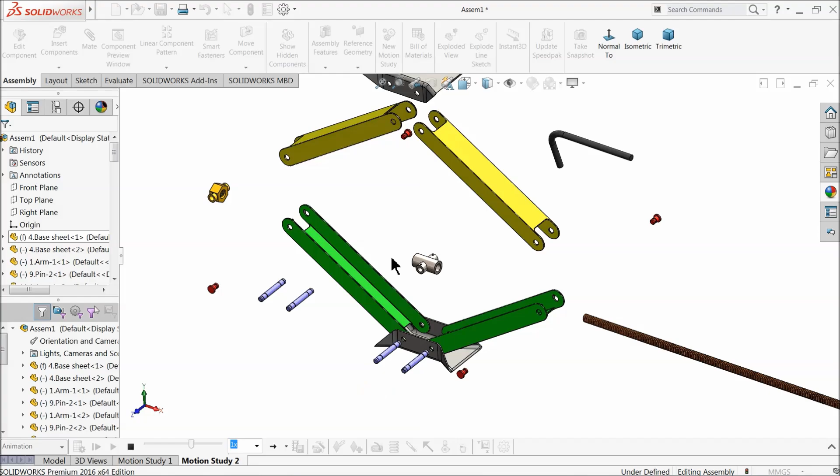Today we are going to design a simple car jack. This is a screw with threaded. Here we will design and assemble at the end, and we will give this little exploded view animation. I hope you like it. So let's see how to do in SolidWorks. It is very interesting and simple project. I'll try to show 2D files also here.

That's it. Now see, this is the jack. This is the threaded view, threaded jack. I wish you like it.

Okay, so let's start, we will make each and every part and assemble at the end. Now here let's start the first part of car jack, arm 1. We will make the first arm here. So choose here top plane, sketch, center rectangle, and draw a rectangle with the help of origin point.

Let's keep the dimension 250 by 45 millimeter. Okay, and extrude only up to 2 millimeter. Now here let's define the material color.

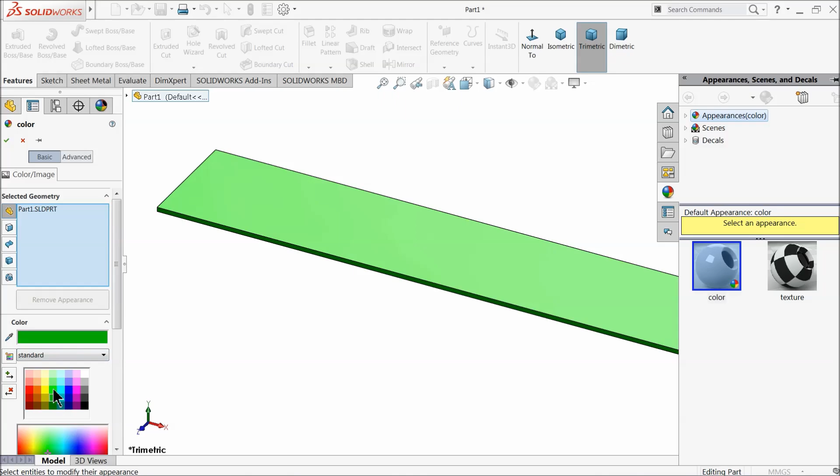Front plane, sketch normal. Here we want to create this. Let's choose a line and start from any one point. Make sure horizontal and convert into half circle and click this line. Exit. Draw a line up to here, convert it into half circle, exit. Now let's define this.

117.5 millimeter, and let's check overall length 235 millimeter. Radius 14 millimeter.

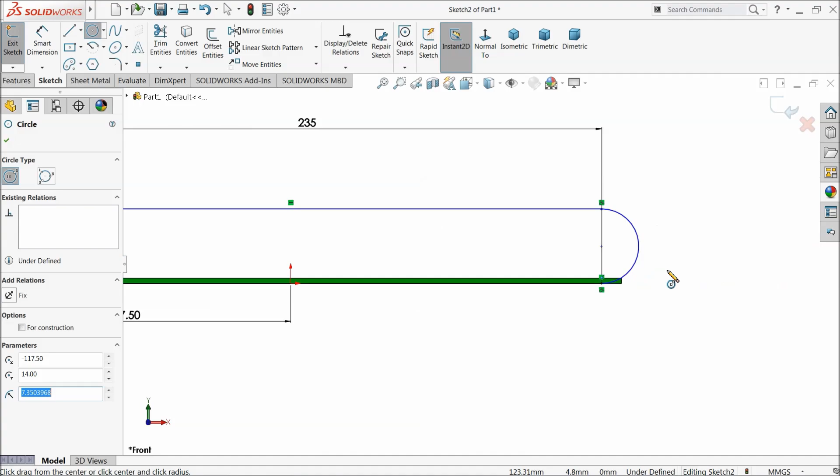Choose here circle. Draw two circles at both the ends. Okay, now select both the circles, make relation equal, and choose smart dimension and define it 8 millimeter. That's it.

Now let's check the dimension, 14 millimeter, okay it's by default. Exit. It should be tangent relation here. Okay, now our design is fully defined.

So select extruded boss. First we want to shift in one corner, so choose here offset 22.5 millimeter, you can see it here. 2 millimeter thickness, reverse.

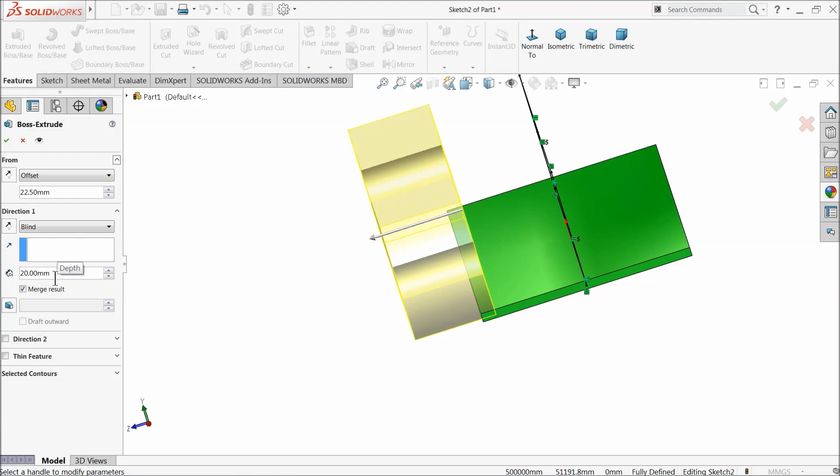This one, extrude, sorry let's keep, no, extrude also we want 2 millimeter. If reverse, then this dimension is not sufficient. Select OK.

Now there is a gap, so choose first drawing, edit. This one it should be 45 degree, 45 millimeter. Exit. Now check. Now it's coming out. Edit. Reverse. Now this is perfect. Okay.

Now select, we want to mirror adjust. So select front plane. Here choose mirror. Select this body only, extruded. Or you can choose it from here. Okay, see.

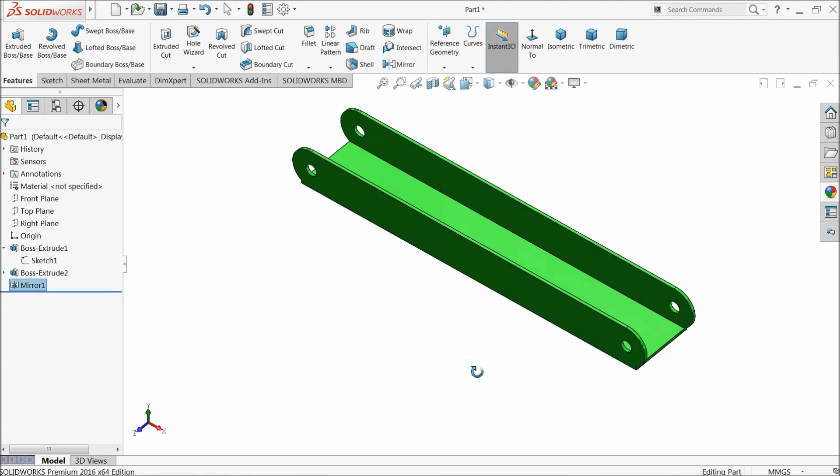Now select this inside face, sketch normal. Choose corner rectangle and select this line and draw a rectangle. Exit. Select these two lines, make relation collinear. Now let's define the dimension. From here to this point, keep 15 millimeter. Okay, this outside you don't need anything because we want to cut it. So choose here extruded cut and keep through all.

We want to cut this thickness. Okay. Now select this face, sketch normal. Choose here center point arc. This is the center point and this is the point, and up to this line. Select line.

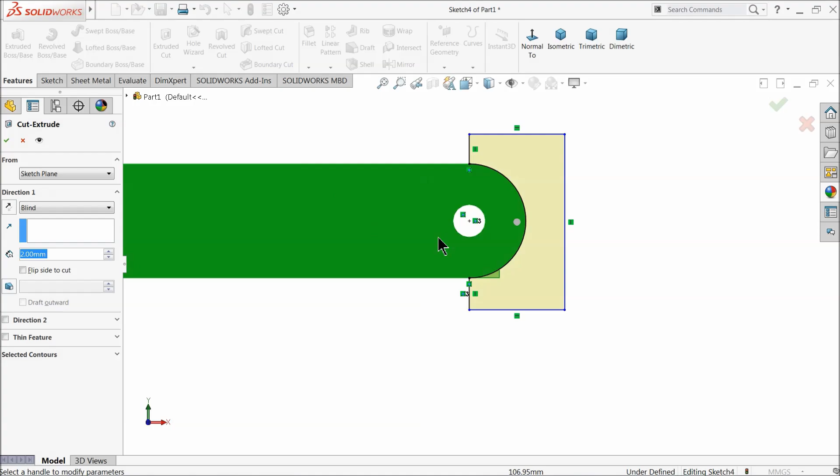Exit. We want to cut this extra face. That's it. Extruded cut, see here. Select here through all. Let's rotate. See, we want to cut on both sides. Okay, now that's it.

Now let's try to mirror. Right plane, mirror. And select here extruded cut 1, extruded cut 2. Okay, that's it. Choose mirror, chamfer, 3 millimeter. Select another end. Okay.

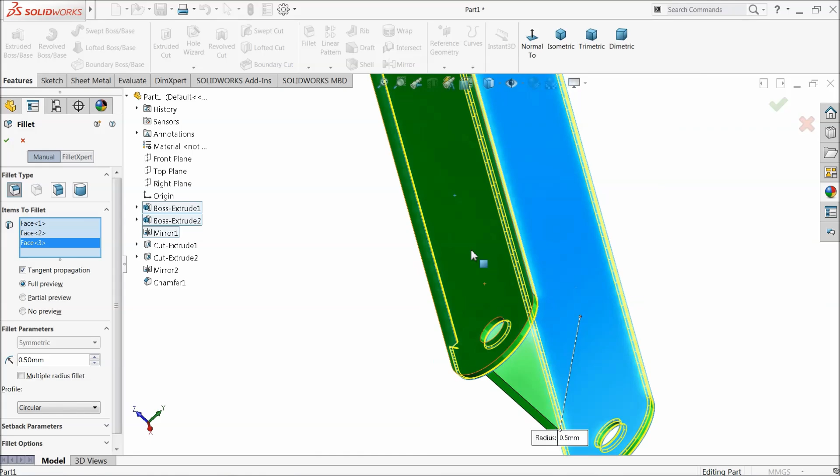Choose fillet. And here select these faces, 0.5 millimeter. It's select inside faces also. Let's keep the back side so that all area will be covered. Okay.

Now this is our first part. Let's try to make it more glossy. Okay, this is save it.

Create a folder. Car jack. Part 1, arm-1.

Now let's, here we will create the arm 2 with the help of arm 1. So first let change this color yellow. Okay.

Now select this part 2, extruded body part 2, just edit, make offset 20 millimeter. Okay, it might show you an error here, but it will correct it. Now go to extruded boss 1, sketch 1, edit, and make this length 40 millimeter. Now exit.

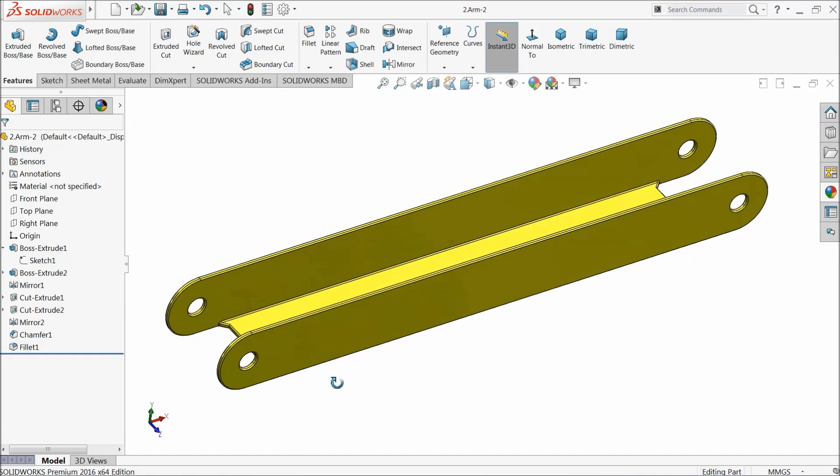Let's see the next part here. Now here we will make the third part, torque handle. So choose here top plane, sketch, circle, and draw here a circle, and let's keep the diameter 9 millimeter.

Now exit. Okay, let's choose front plane, sketch, line here, and here we will draw the path for torque. Exit. Let's define it 150 millimeter and 80 millimeter. Okay, choose here fillet.

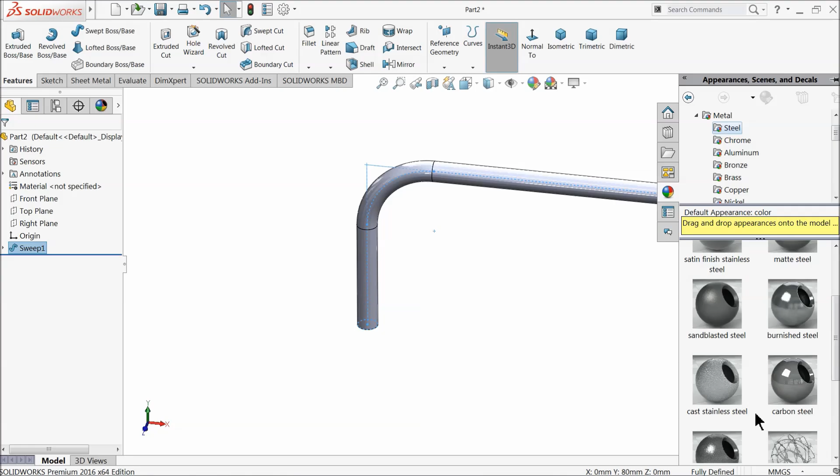Okay, let's keep 30 millimeter, that's fine. Now select here Sweep boss base, select here first profile, then select the path, see here. Okay, go to appearance, metal, and let's define some steel metal. And let's see the machined steel or rough steel. Or let's define some iron.

Just drag into this part, appearance filter. Okay, let's save this part number 3, torque handle.

Here the next part is base sheet. So let's start. Top plane, sketch, and select line up to origin point, then go down, make little taper and connect. Draw one more line, exit. Now let's define it 70 millimeter,

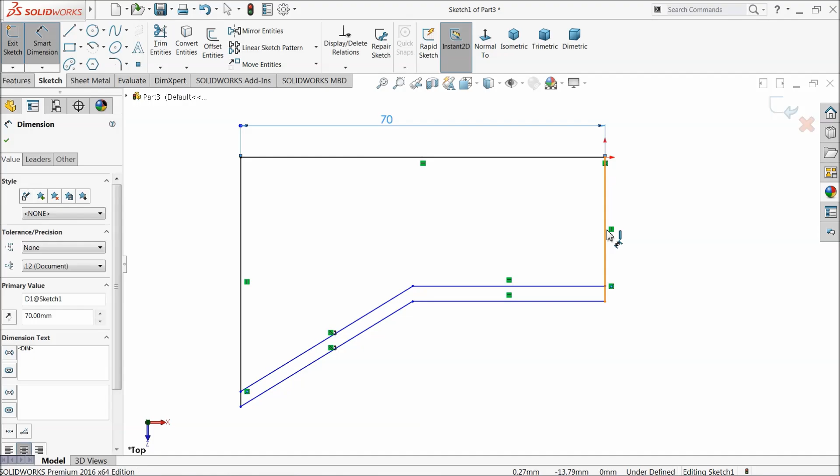25 millimeter, let's say 40 millimeter, and let's make the gap angle 150 degree. Okay, let's define the gap, 2 millimeter. Okay, now select both the end points, make vertical relation.

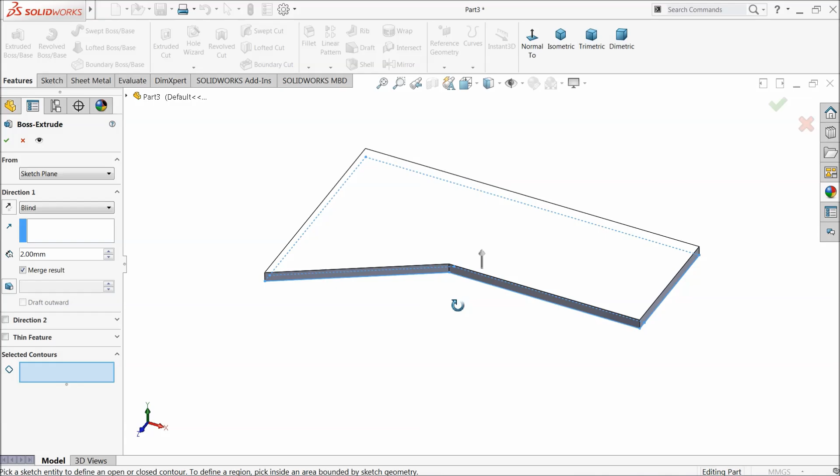Now it is fully defined, our sketch is fully defined. So select extruded boss, select this face and this face also, make 2 millimeter thickness. That's it. Okay. Now again choose the same sketch, extruded boss, same sketch, extrude.

Here select this area only, you can see. Extrude up to 32 millimeter. Okay, that's it.

Now select this face, sketch, normal. Now here we want to cut some, select from here to here, exit. Now let's define this bottom edge, 2 millimeter, 1.875 millimeter. Okay, that's enough, we want to cut it.

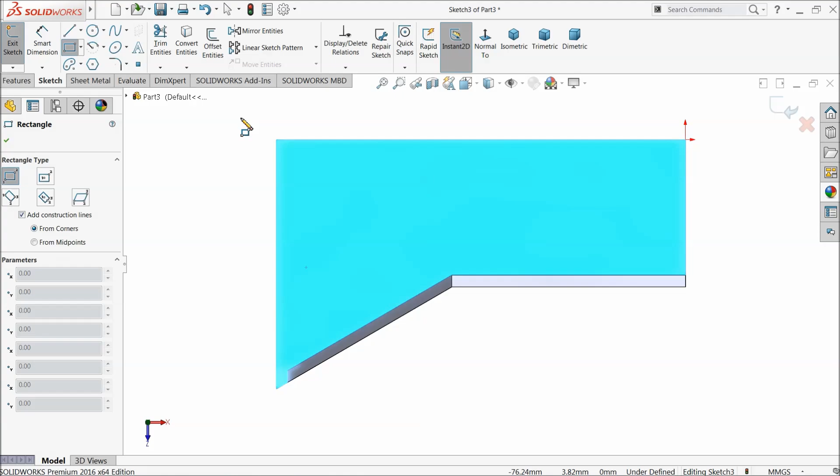Select here extruded cut, keep mid plane. Okay, that's it. See here. Now select this face, sketch, normal, corner rectangle, exit.

Select these two lines, collinear. Now let's check one more time the gap, 1.875 millimeter. Okay, that's enough. This is what the portion we need to cut it. Select extruded cut and here keep end condition through all.

Okay, now it's time to add something, some fillet we need to add here. Choose fillet, keep 15 millimeter. Select this edge, select this upper edge and select the back side edge. Now let's see, okay, see it's become fully changed.

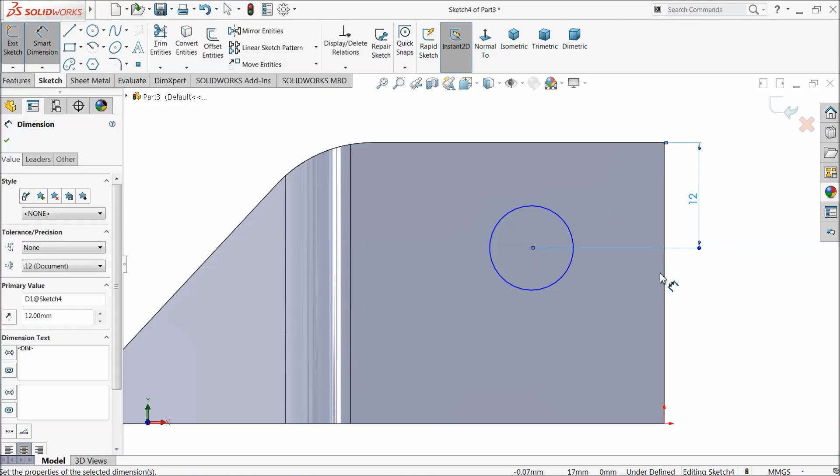Select this face, sketch, normal and choose here hole and let's make a hole here. 12 millimeter, and the distance from outer edge 25 millimeter. 8 millimeter the diameter.

Okay, select extruded cut, keep end condition through all. Okay, again check the dimension, 25, 12, 8 millimeter. That's okay.

Now choose fillet, select 5 millimeter. This time select this edge and inside edge. Okay, now see it's become fully converted.

Fillet, select this edge only. Okay, close. Let's reduce it, 3 millimeter, also too big. Point 5, let's try a little bigger, 1 millimeter. Okay,

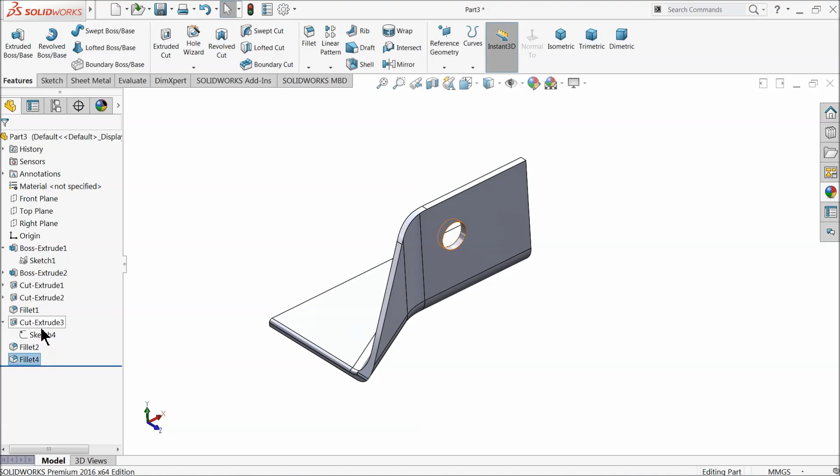Now it's time to mirror this body here. Actually this, let's try some little bigger, 4 millimeter, no, 3 millimeter. Okay, that's also enough, 3 millimeter.

Choose front plane, mirror, select here bodies, select this full body and you can see it here, preview, solid merge. Okay, that's it. Now the next, choose here right plane, mirror, choose here body. Now you can see it here.

So this is our base sheet. It is usable for base and lifting to the vehicle. Make little dark color. Okay. Now let's save it.

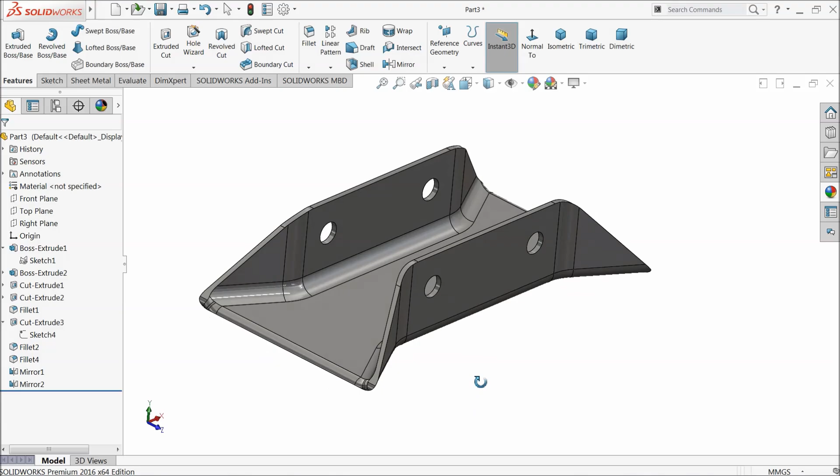Part number 4, base sheet. Let's see. Now here let's do the main part of car jack, screw rod. So let's start.

Front plane sketch. Draw a circle and choose smart dimension and make it 8.5 millimeter diameter. Then extrude it and extrude up to 520 millimeter. Make it reverse. Okay.

Let's define the material. Okay. Now here we want to create the thread. So first choose this face, circle, and draw little bigger circle.

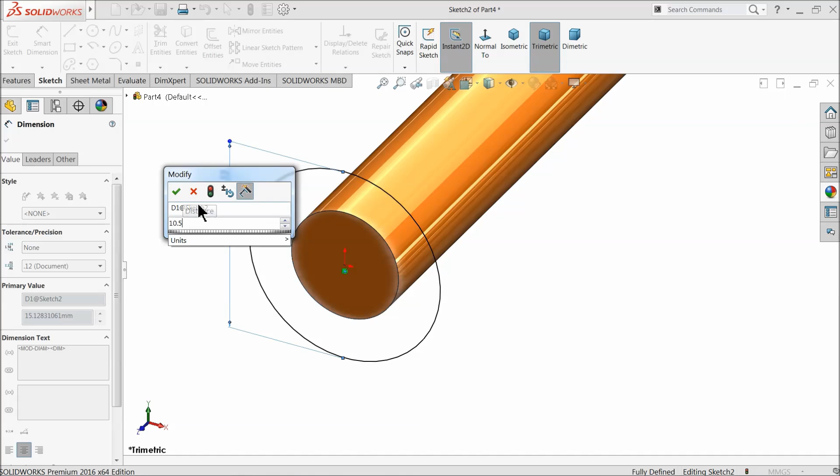Let's say 10.5 millimeter. Go to feature here, and here you will find one option, helix and spiral. Now here we want to create some teeth and keep pitch and height constant. Height, let's say we will keep 102 millimeter.

Pitch, let's say 3 millimeter. This one we can little increase also, 306. Anyway, let's try 102 only, and then little we will extrude reverse direction 90-degree clockwise. That's it.

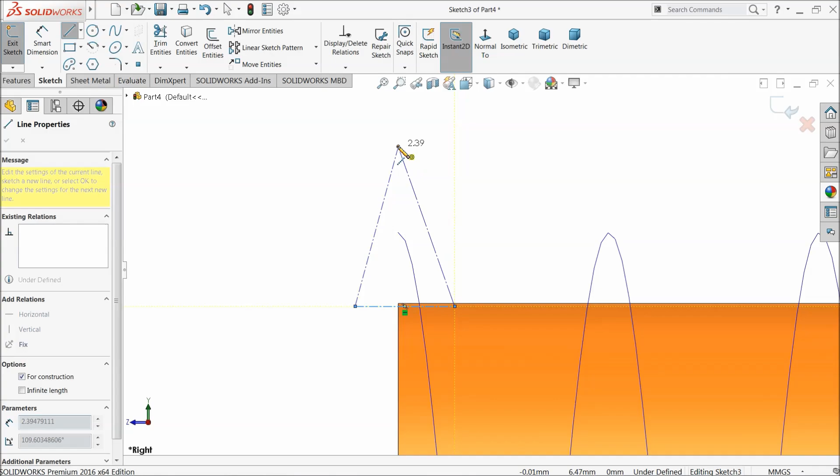Now choose right plane, sketch, normal. Now here let's make the profile. Make by center line. Exit. Vertical.

Keep angle 30 degree. Okay. Now select this point and this line collinear, so that it will be perfect here. And one more relation, collinear. See, it's just parallel to this line, or even you can create a relation from here.

Draw one more line. Make sure both the lines horizontal. Now let's define it from origin point.

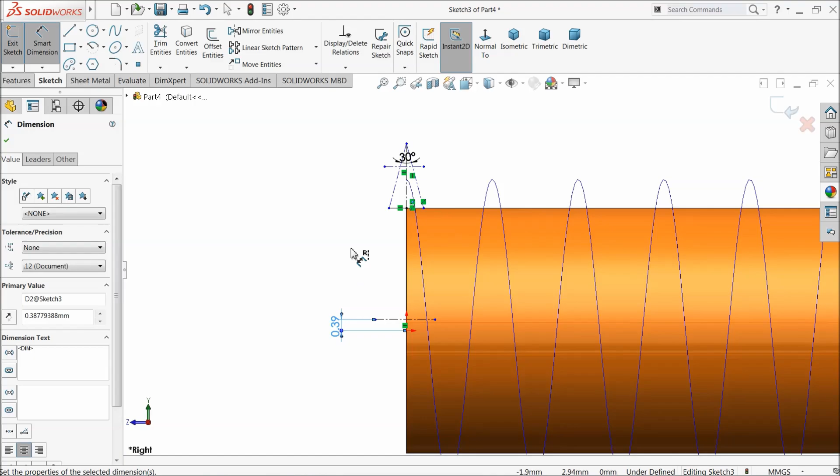5.25 millimeter. The second line from origin point 6 millimeter. See here. Okay.

Star point. I think no need, this in perfect position. Choose here line. Let's define it first. Distance from here, no, we actually need a star point. Put it one star here, one in the center.

.75. This is what we required here. And put one star point here, and let's define this gap. By default 1.1, that's okay. Now select line and connect it here to this point.

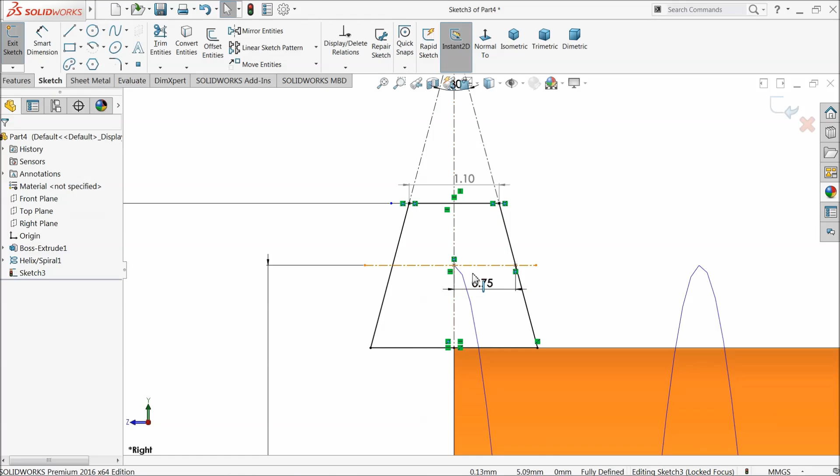Exit. Now this is our geometry. Exit. Swept boss base. Select the profile. Now see, you can see the thread.

Now here make one more option. Uncheck this merge result. Okay. Now let's make multiple number of this thread here. So just go to insert, feature, move and copy. Select translate, copy. Select these threads. Sweep1.

You can directly select from this list. Keep distance 102 millimeter because this is our distance in helix spiral height. Make 2, 3, 4. 4 is enough to cover all the geometry. Okay, that's it.

Now select this face, sketch, and draw here a quite bigger circle. 12 millimeter. And extrude it up to 11 millimeter reverse direction. Okay, that's it.

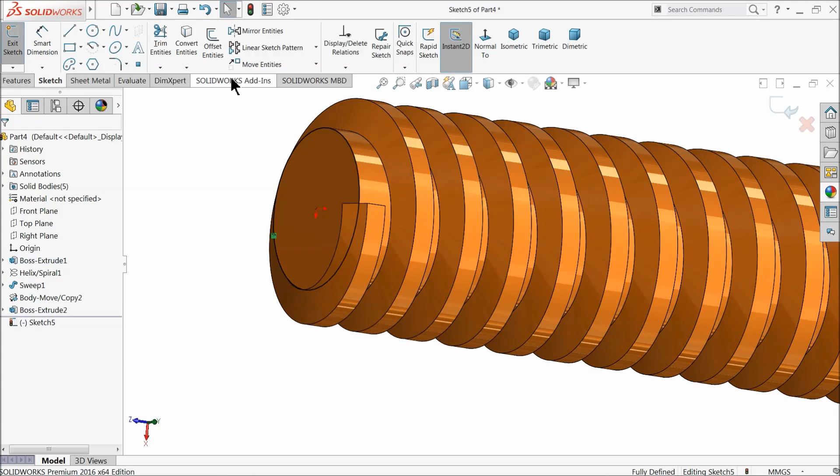Now comes here, see, we want to trim this face, so select this face, sketch, convert entity. Now this circle converted, just extrude it. .02 millimeter. Okay.

Now we want to cut some face. I'll again choose the same face, sketch, circle, up to this. Now let's define outer one 13 millimeter. The inner one is same as previous, 8.5.

Now select extruded cut and make the depth 1 millimeter. See here. That's it. Make chamfer 3 millimeter, 30 degree. Select this corner.

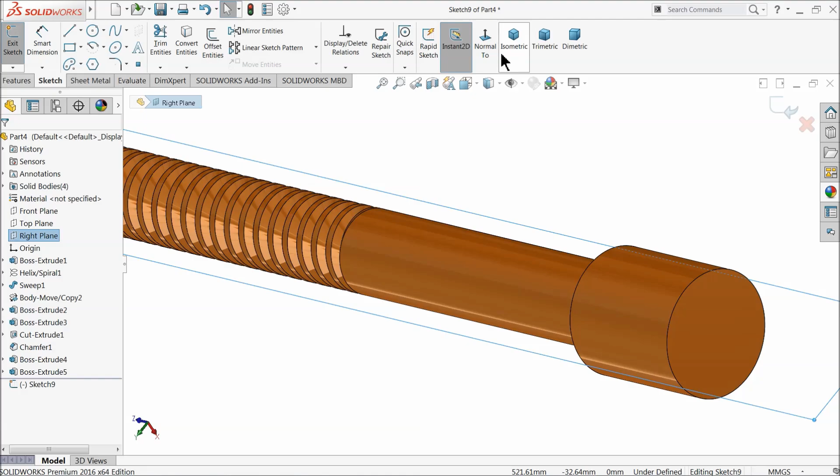Now here we want to create one groove, so select right plane, sketch. It's hanging, I think. Okay. And draw a center line. Select corner rectangle. Okay, now let's define it. 1.55 millimeter. 1.2 millimeter.

Okay, now let's drag it up to a distance from center line, 5.65 millimeter. Okay, now distance from this line, 40.2 millimeter. That's it. Fillet 0.1 millimeter and select these two corners. Okay.

Now select here revolve cut. Select this line as axis. You can see the preview here. Okay, so this is our simple groove. We required this groove for assembly. Here we will fix some circlip.

Now select top plane, sketch. Now here we want to create a hole for torque handle. 10mm, and the distance from, let's say, this corner keep 9mm. Okay, and select here extruded cut and keep end condition mid plane. Okay.

Fillet. Okay. So this is our screw rod.

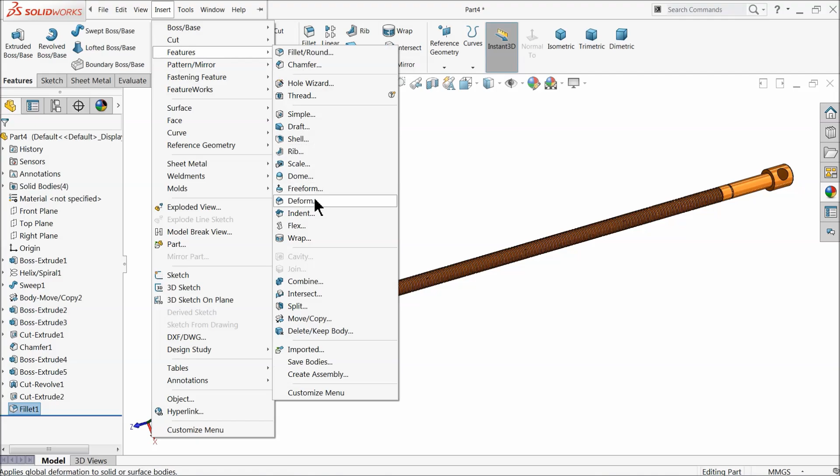We will use one more command, insert feature, combine command, add. 1, 2, 3, 4, and okay, everything is selected here. Okay, now this all become one body. And let's save this screw rod, part number 5, screw rod. Okay.

Now here the next part is screw nut. We already created screw rod, so let's start. Front plane sketch, select here circle and draw a rod here. Let's keep the diameter 8.5 millimeter. Okay, and select extruded boss and extrude up to 30 millimeter. Keep reverse direction. Okay, that's it.

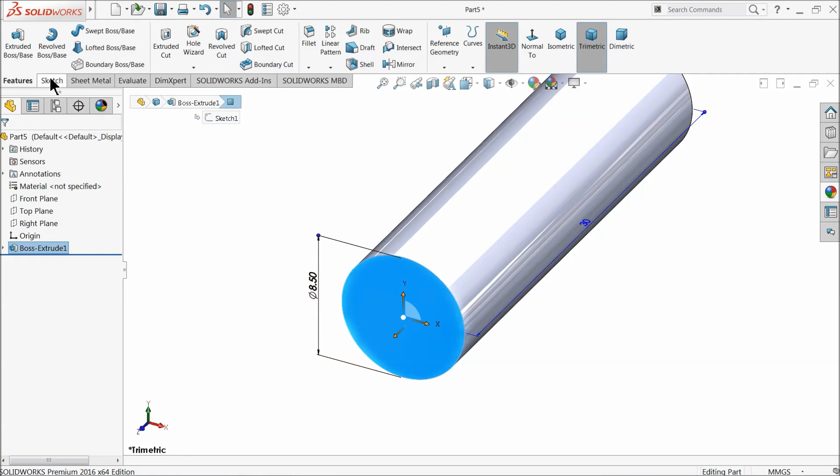Now here we want to create some threaded portion, so let's make it. Choose this face, sketch circle, and let's keep the diameter 10.5 millimeter. Go to feature, go to curves, choose here helix and spiral. Keep height and pitch constant. Pitch height keep 22 millimeter. This is sufficient, pitch 3 numbers, and make it reverse 90-degree clockwise.

Okay, that's it. Now it's time to create some profile, so choose here right plane, sketch, center line up to this point. Exit. Now define some center line. Make sure both the lines are horizontal.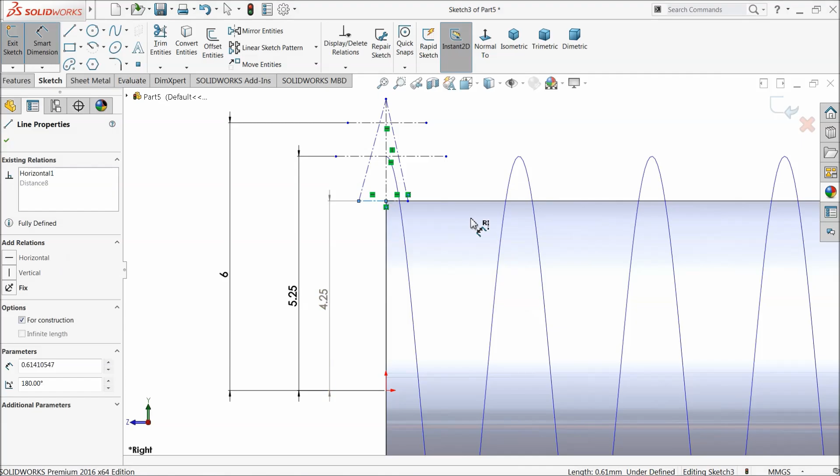Now let's define the dimension. 5.25 millimeter. The upper one 6 millimeter. And this one by default I think 4.25, that's okay. Keep angle 30 degree, 15 degree. That's it. Choose here star point, 1 star here, 1 star here. Okay.

Now let's define .75 millimeter. Now this one select by default 1.1 millimeter. Okay, now this is fully defined, so select here line and create our main geometry up. Okay, exit. Now this is our profile geometry.

Exit. Go to Swept boss base. See here profile selected, just select the path. Now you can see the thread. Go to option, uncheck this merge result. Okay. Now you can hide this.

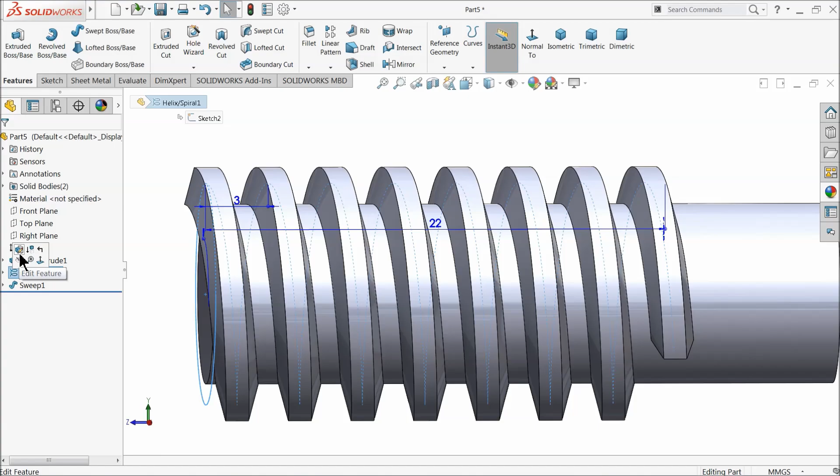Now we want to create a main body, so choose here top plane, sketch, select corner rectangle. Okay, now let's define it. 10 millimeter by 15 millimeter, and the distance from origin point let's keep 2 millimeter, and the same here, the horizontal distance 4.5 millimeter. That's it.

And now let's first make one center line so that we will easily revolve our body. Okay. Select revolve boss base, select this line as axis. Unmerge the result—it's important because we want to delete this face. Okay, see here.

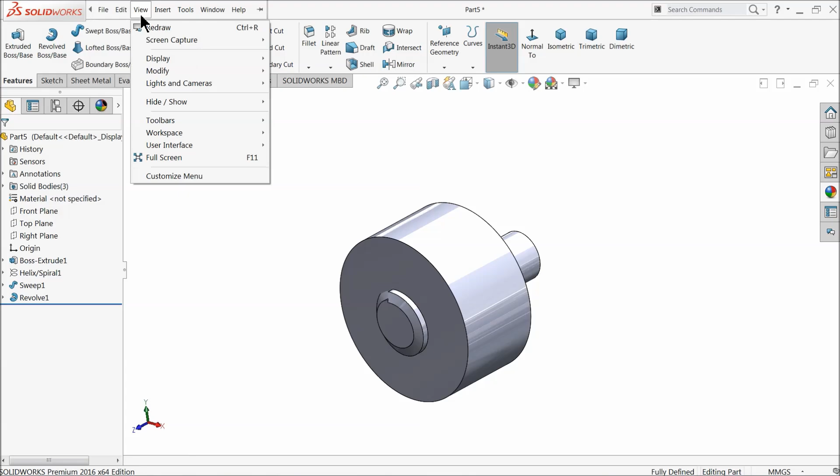Now go to insert feature and here you will find add combine. Select this option, combine, here select subtract. Select this is the main body and here select extruded boss and sweep, or you can directly select swept and extruded body. Okay, now see it's cut out, we cut the thread inside.

Now let's give the nut shape a sketch normal. Choose here polygon, keep 6 numbers. Okay, now select this any one and vertical and let's make it 14 millimeter. Circle, take some bigger circle, any dimension. Okay, now select extruded cut, then this portion we would like to cut. Okay.

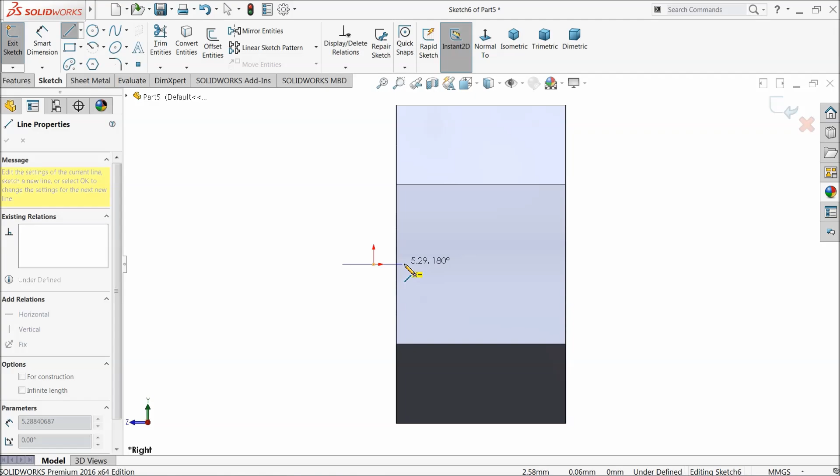Now see it took this shape, nut shape. Now here we want to make some circular cutout. Now choose here right plane, sketch. Select here line, it must pass through origin point. Exit. Now let's define it.

60 degrees. 4 millimeter, this is the important dimension, and outside anything it's up to you. Make 8 millimeter.

Select here revolve cut. Now select this line, bottom line, as the axis. Okay, now we cut it here.

Now we want to mirror it, so let's check if any plane is available. No, so we need to create a plane. Just go to plane, select this face and this face, and it's going to create a mid plane here.

Now select this mid plane, mirror, and select this cut revolve. You can see the preview here. Okay, that's it. Now hide it.

Right plane, plane, we want to create one more plane here. Keep distance 18 millimeter. Okay, now select this plane to sketch a circle.

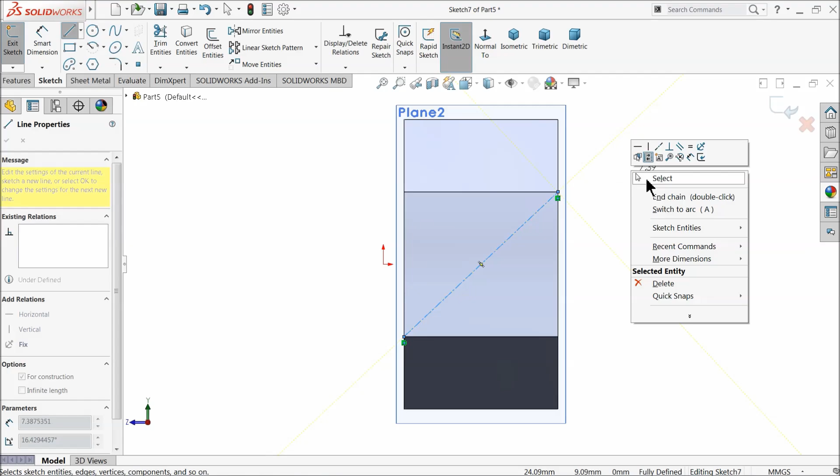We need to draw a center line, so do one thing: draw a diagonal line. Now define the midline.

Keep diameter 8 millimeter. Okay, now make the circle little small. Now let's make the gap between two circles 2.5 millimeter.

Delete this circle and make it little bigger. Now try 2.5 millimeter bigger than this 8 millimeter.

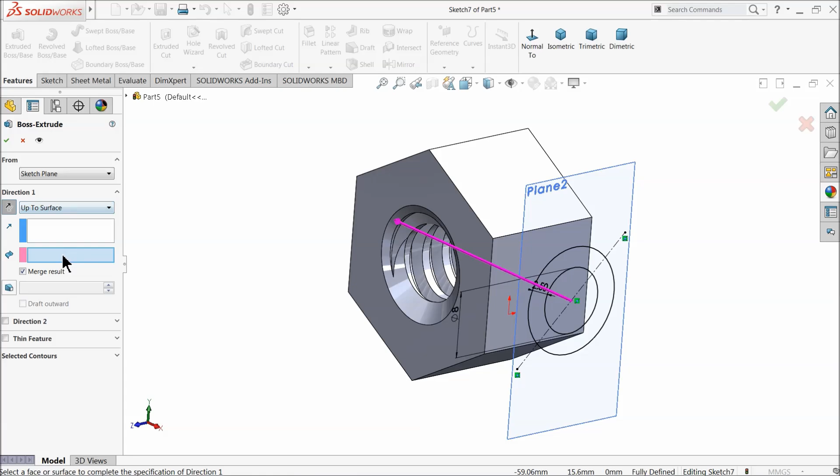Okay, now select extruded boss, keep reverse direction, and select here up to surface. Select this surface.

Now hide this plane. Now again choose the same sketch and select here extruded cut. Now select contour, here select this inside portion only, see this inside portion, and keep 10 millimeter cut out.

You can see it here. Okay, see, it is very useful during assembly.

Now it's time to mirror this one, so let's choose any suitable plane. Okay, right plane, mirror. First select this body and extruded cut.

Something went wrong. Clear those.

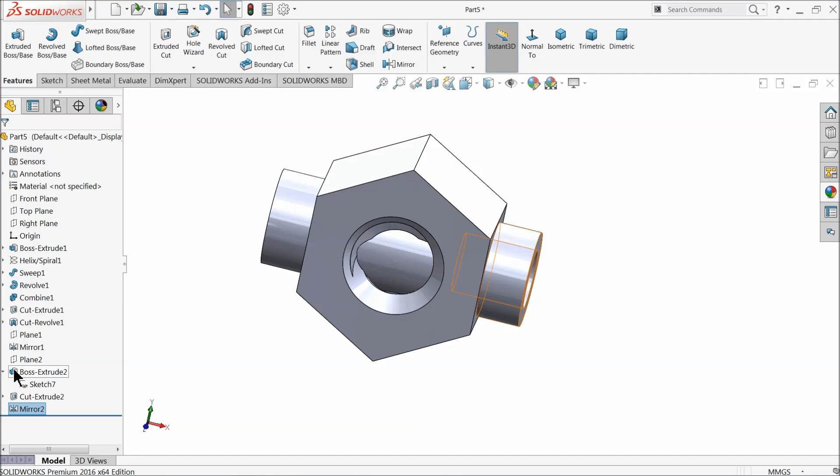Exit, and we will do one modification to this extruded body: edit, and let's not make a surface, keep it blind, and make 10 millimeter. Okay, now see, that's perfect, it's mirrored.

Now let's create one more plane, top plane, plane, 6.5 millimeter.

Now select this plane, take this position, hole wizard, select here straight tap, standard DIN, tapped hole. We want to create some tapped hole. Let's keep 3 millimeter and 6 millimeter blind.

Choose here cosmetic, select position, select one here and one here, uncheck this smart dimension.

3 millimeter, .5, the same as what we will find here, 3 millimeter, .5 millimeter. That's it, so this is the hole position.

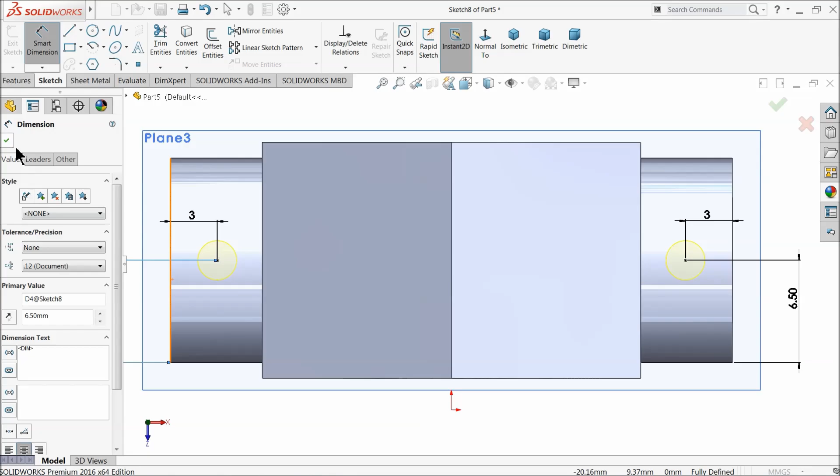Okay, select here. Okay, see, if you want to see this tapped hole, just go to options, properties, detailing, select shaded cosmetic thread.

Okay, now you can see here, now you can hide this plane. So this is the screw nut.

Let's make it little different. Okay, that's looking vibrant. Okay, let's save it. Screw nut.

Now here let's make part number 4, screw holder. Front plane, circle, make 2 circles, outer one keep 20 millimeter and inner one 12.2 millimeter.

And extrude it, extrude up to 40 millimeter and keep end condition mid plane.

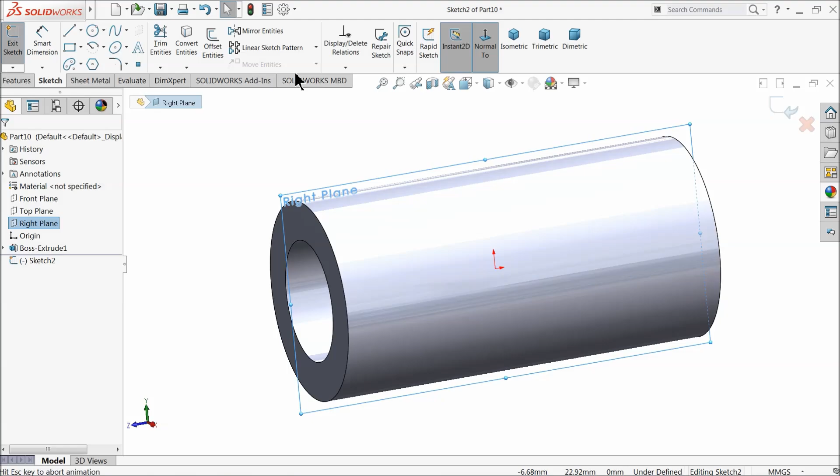See, now select right plane, sketch normal, choose here circle, uh, cancel it. We want to create a plane, so right plane, plane, 18 millimeter. Okay, now select this plane, sketch, and draw here two circles from the origin point.

Now let's define the outer one, keep 14 mm, and the inner one let's make 8 millimeter.

Now extrude. Here choose up to surface, or even select up to next. Up to next not sufficient, I think. Let's select surface.

Right plane, mirror, and mirror this part. Okay, that's it. Now hide this plane, top plane, and create one plane just 7 millimeter above the top plane.

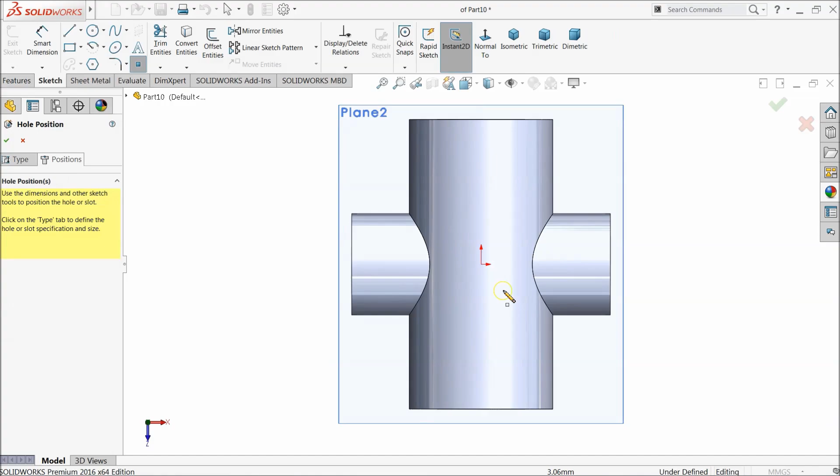Okay, now select this plane and take normal position, hole wizard. Select here straight tap, DIN standard M3, 8.6 mm, take position, make sure parallel to the origin point.

Okay, choose here smart dimension, three millimeter, the same here, 3 millimeter. Okay, now select both these center points and origin point.

We need to make actually a relation, horizontal. Try horizontal. Okay, okay. Now see, go to options, documents, detailing, check the shaded cosmetic thread.

Okay, now hide this plane. You can see this is our fourth part.

Let's define the material, steel, satin finish stainless steel. Let's save as part number 4.

This one is actually part number 7, screw holder.

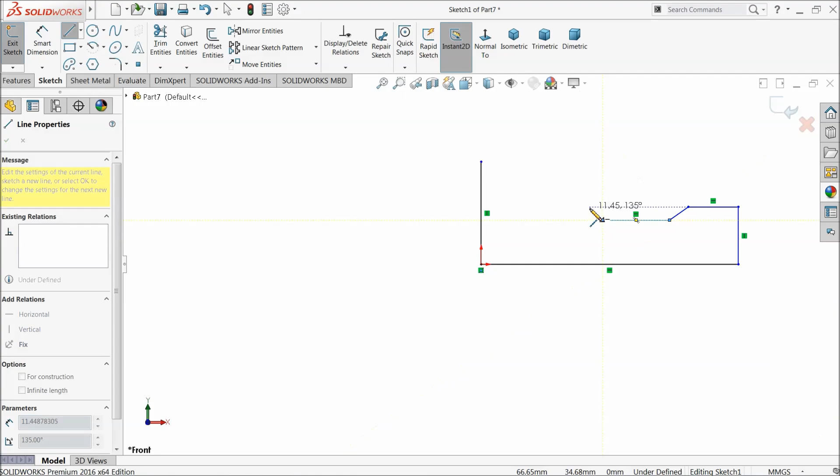Now let's make the next part. Now here let's make the pin, the first part of the pin. So choose here front plane, sketch, line, connected. Now this is our main geometry.

Now let's define it. 14.5 millimeter, 6 millimeter.

Now select both the lines, collinear. One millimeter, 3 millimeter, 3.6 millimeter. Okay, just drag it here and select this, both the lines, make relation equal.

5.7 millimeter, 12.5 millimeter. Let's make the height 4 millimeter. So this is the geometry of the pin.

Select here revolve boss base, this line as the axis. Okay, define some dark color.

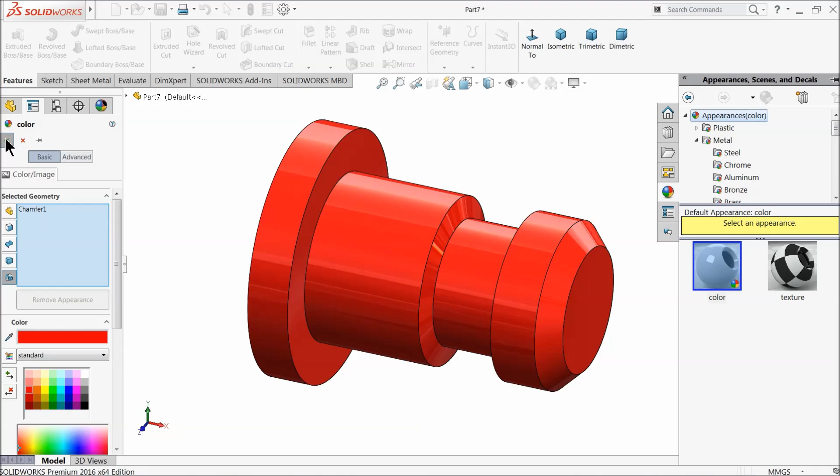Chamfer 1 millimeter, 45 degree. Now let's save this, pin-1.

The next part is pin number 2. So choose front plane, sketch, corner rectangle. Make sure it passes through origin, exit.

Select the origin point and this line, and here keep one relation, midpoint. Okay. 60 millimeter, and the height let's make 4 millimeter.

Select revolve boss base, bottom line select as axis. Okay, chamfer, chamfer 1 millimeter 45 degree. Select both side edges. Okay, that's it.

Now choose top plane, sketch. Now here we want to create some grooves, so select corner rectangle. Exit. Now select one thing, collinear.

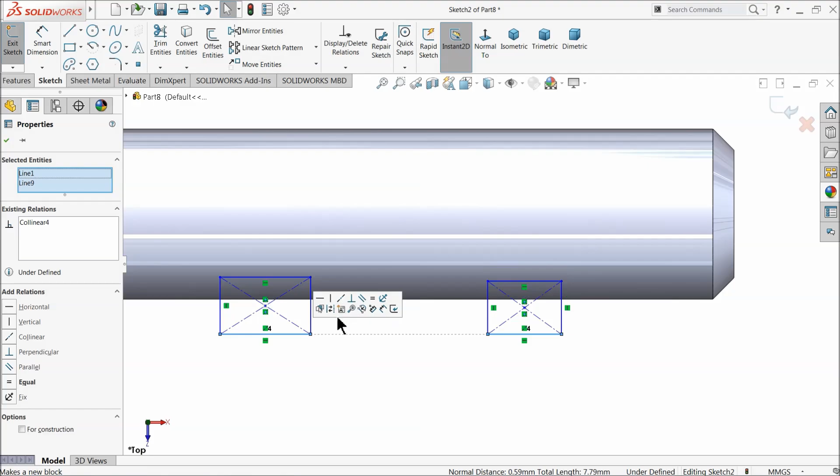Equal, equal. Now let's define it.

0.7, 1.3 millimeter. And let's choose distance.

25.5 millimeter. Eight millimeter, and let's select this distance from here.

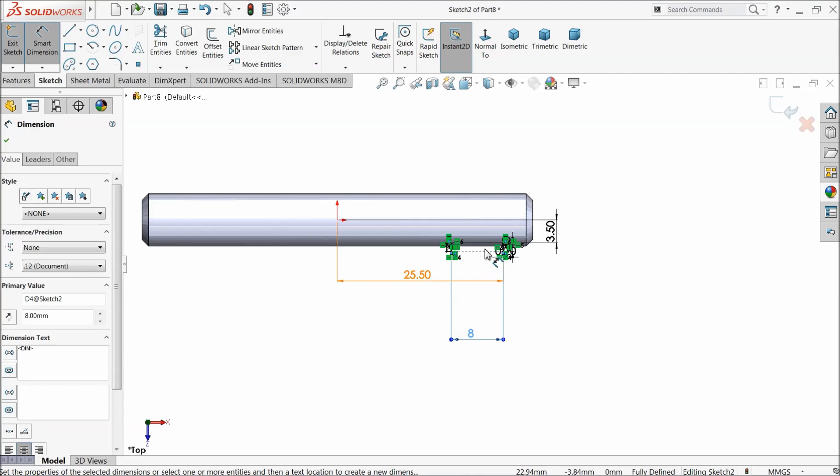0.5 millimeter. That's 8 millimeter. Okay. Fillet 0.2, and select these two inside corners, and the same here.

Let's draw a center line. Now choose here revolve cut, select this line as axis. You can see, so now this is the groove for retaining ring. And let's try to mirror, right plane, mirror, and select this revolve cut.

Now that's it. This is the pin number 2, and let's save it, we will give some color.

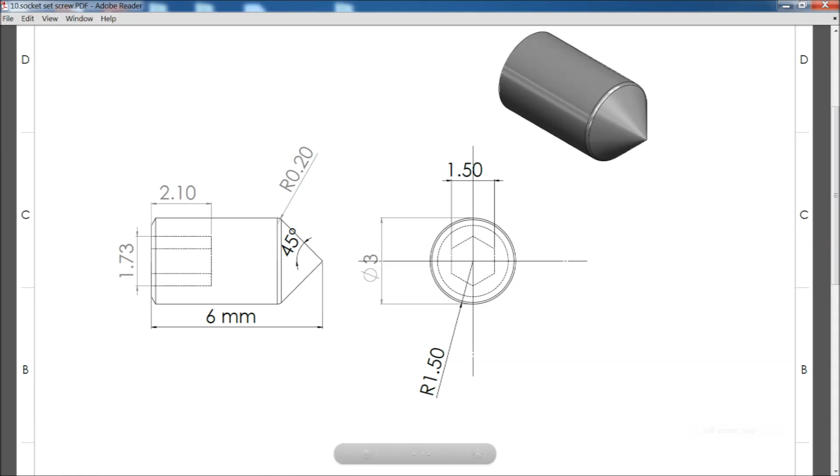Now here the next part, socket set screw. Front plane, choose your line, exit. Now let's define it, 6 millimeter, keep width diameter radius 1.5 millimeter, and let's make the angle 45 degree. Okay, select revolve boss base, and this is the body going to create.

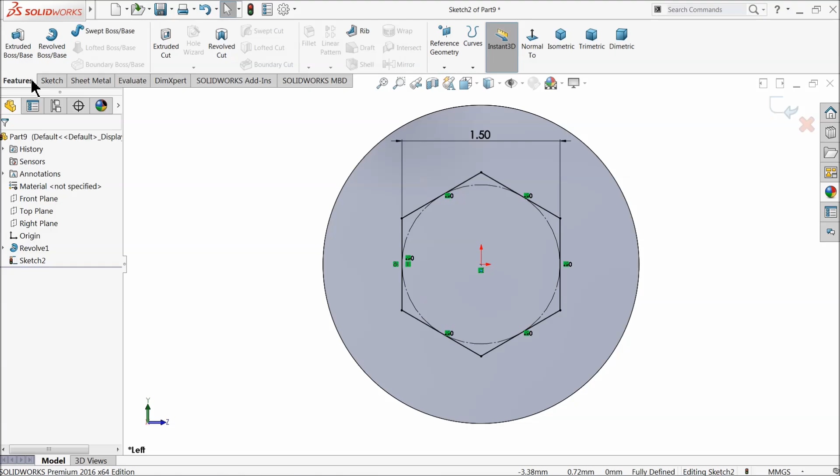Okay, select back surface, sketch, choose here sketch polygon, exit, vertical. Now let's define this gap 1.5 millimeter. Okay, and select extruded cut. Make the depth 2.1 millimeter.

Chamfer, select 30 degree, 0.1, 60 degree, 0.15. Okay, that's it. Fillet 0.2 and select this corner.

Now select the whole part. Okay, part number 10, socket set screw.

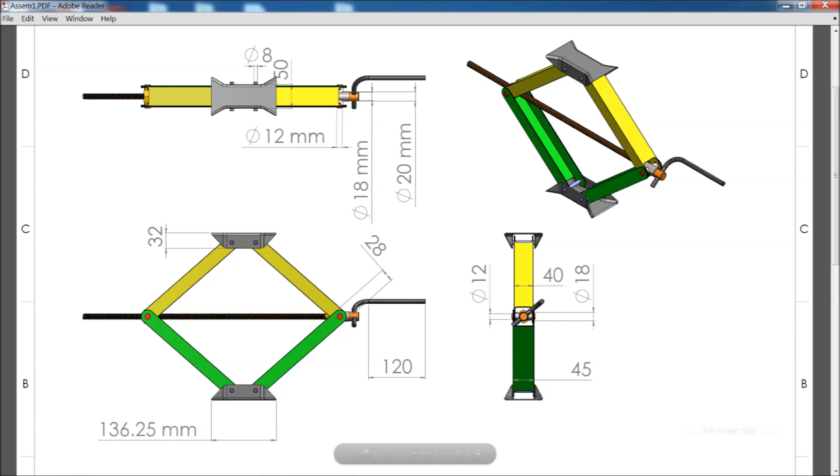Now here let's start the assembly of car jack. So select here new assembly. Okay, now this is the SolidWorks assembly window. Let's browse our first part, so we will keep first part, base sheet.

Browse arm 1, and select pin 2. This is arm 1, this is pin. Now press Ctrl key and drag and make one more arm.

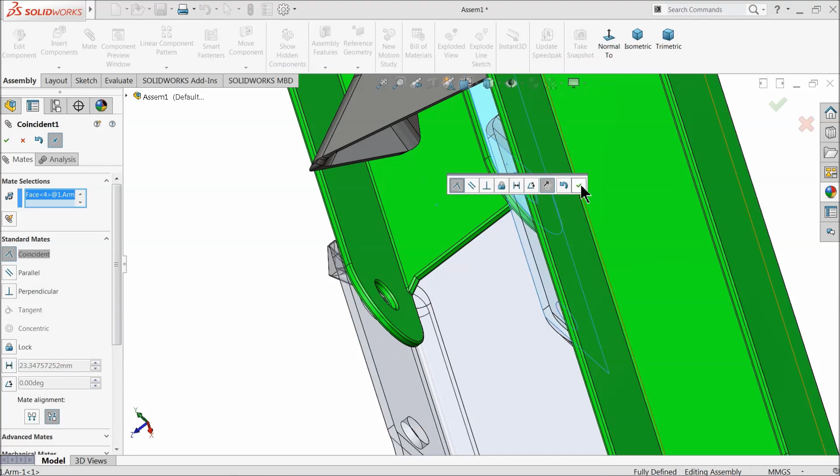Choose here mate, select this clear inside hole and select this inside hole. Make relation concentric. Okay, now select this face and this face, coincident. I think coincident relation deleted.

Mate, and go to standard mate, advanced mate, choose here width, select these two outer faces and these two inner faces. Now this arm is in the mid center of this base sheet. Okay, that's it.

Now the same thing we have to apply here. Select this circular face and this circular face, choose here concentric. Okay, now go to advanced mate, select width, first select both the sides, now this side. Okay, now this is here, it shows centered.

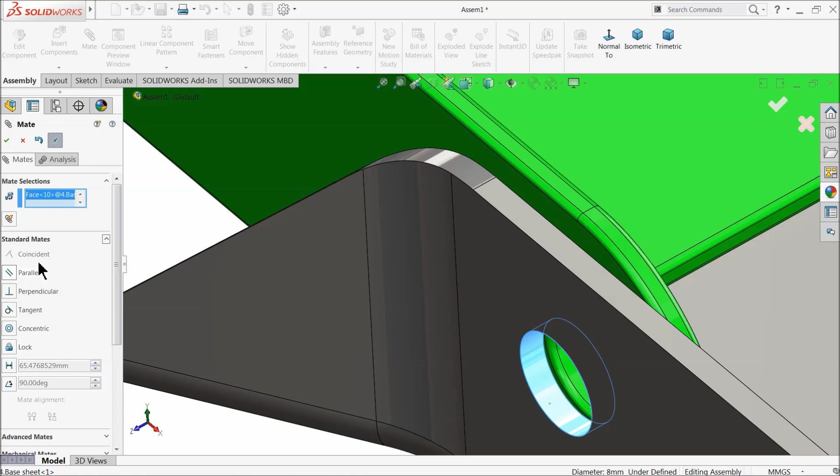Select the pin and this hole, go to standard mate, choose concentric. Now again try advanced mate, width. First select both the faces of pin 2, these two faces we selected, then the body is base sheet two faces. You can see it's fixed here.

Now let's Ctrl key and copy one. I think not yet came. Again press Ctrl key, copy. Okay, mate, select the face, both the faces, concentric relation. Okay, go to advanced mate, choose here width. Select both side faces of pin, now the faces of base sheet, see here it's centered. Okay, now the base is fixed here.

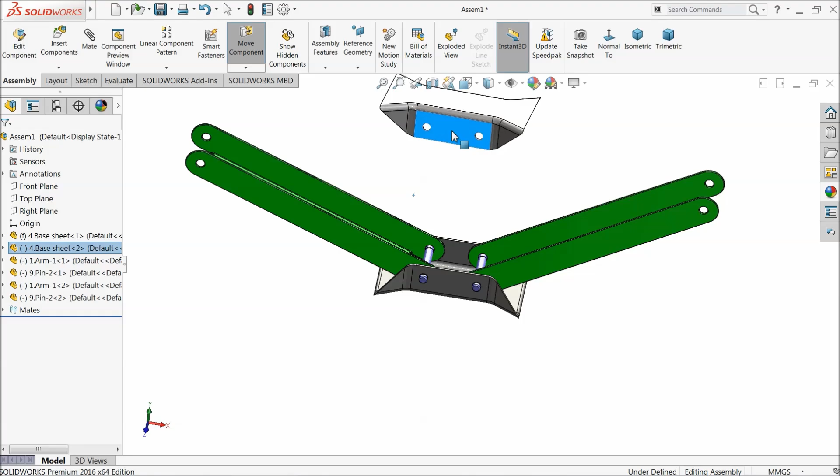You can see. Now let's browse our arm 2. Okay, press Ctrl key and drag, create one more. Now just rotate this like this.

Choose mate, select this circular face, and here also select this circular face. Concentric relation. Okay, advanced mate width, select both side faces. Now here also again choose width, select this body and again base sheet. Okay, now this arm 2 also in the center position of this base sheet 2.

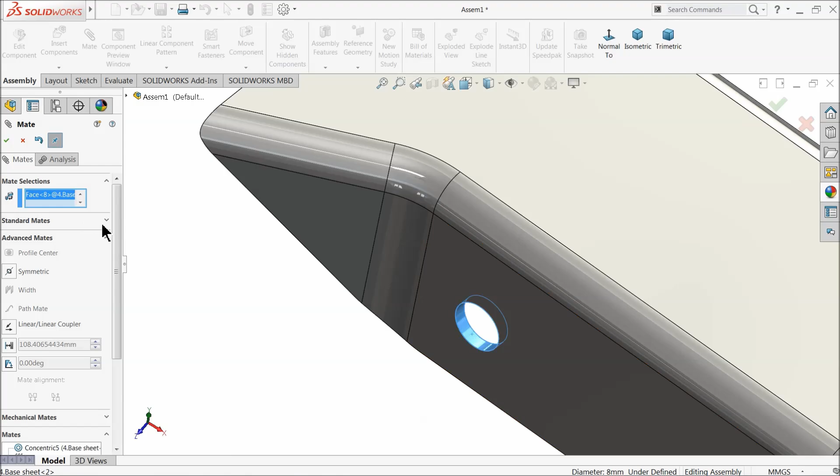Now just select the circular face and circular face of this hole, and go to standard mate, select concentric. Now see it's fixed here. Okay, now select this circular face and this circular face, concentric relation.

The same we will do it here. This circular face and choose this circular face, concentric relation. Okay, now we need to apply, select this face and this face, coincident. Okay, now let's check here, okay both in center point. That's perfect. Now the main base body is ready.

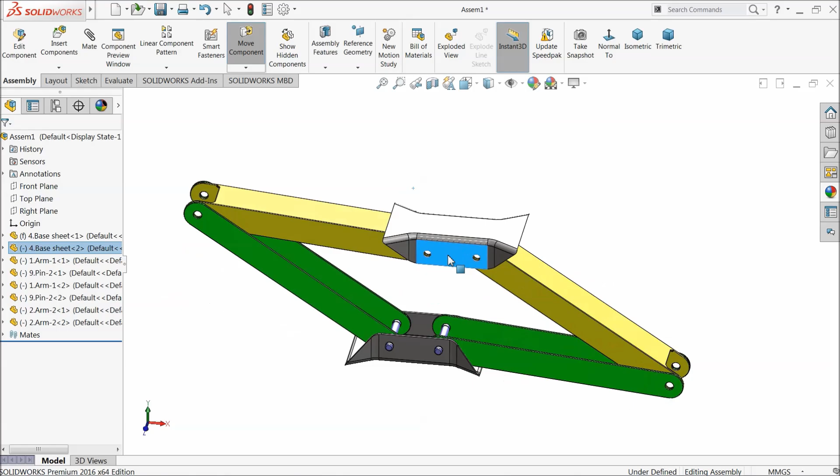You can see. Let's create one more, parallel. Select this face and this face, keep parallel relation. Okay, now let's try. That's it.

Now let's browse, here also we need to fix the pin. Now let's choose here mate. Select this hole and pin, concentric relation. Okay, here also choose the pin, hole and pin, concentric relation. Okay, now come this side, select this face and the previous face, pin face. Okay, previous pin face and this face. Okay, now this is fixed in their position.

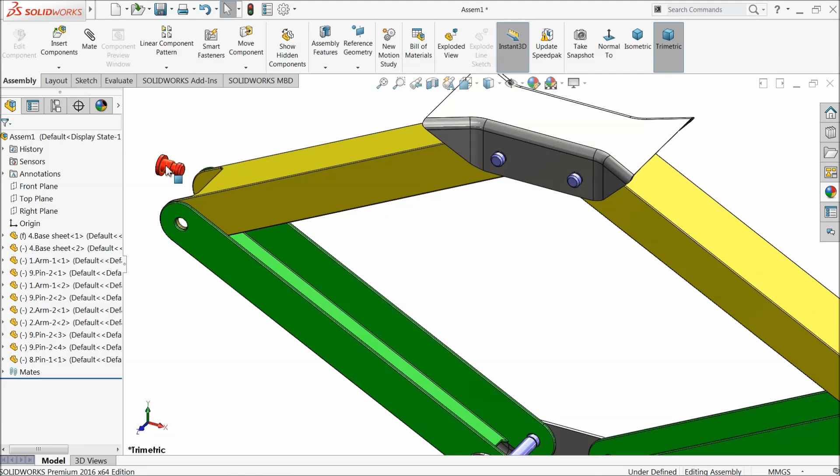Let's browse the other parts. Now this time choose screw nut, better choose pin 1. Press Ctrl key, drag. We want to create 2 pins here.

Mate, select this face and any circular inside face, make it flip it, use flip mate. Here also you can choose flip mate alignment. Okay, select this face and this face.

Now you can see, just adjust this face and circular face. Select here flip mate alignment. Okay, now drag it outside. Select this face and this face, coincident relation.

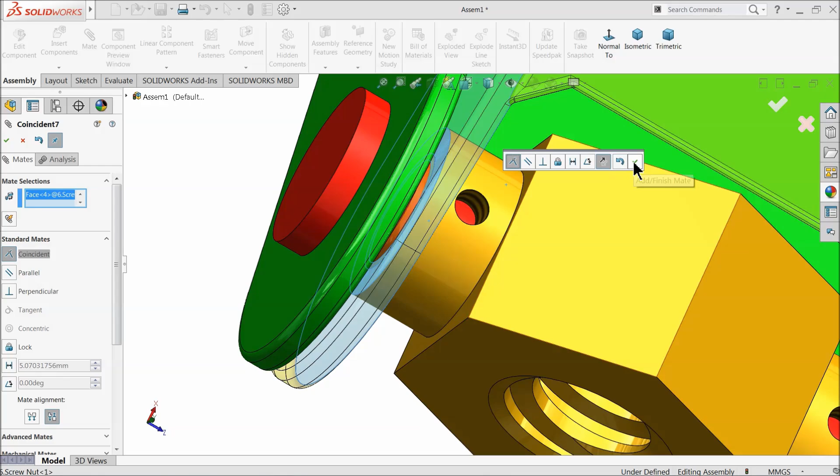Now let's browse our next part, let's bring here a screw nut. Okay, mate, select this circular face and this circular face. Mate, concentric, coincident. Okay, now select this face and this face, coincident relation.

Okay, now it is rotating. We want to keep like this. So just check its plane. Okay.

We will select this plane and select the right plane of assembly. Choose mate, select parallel. That's it. Now it will be parallel.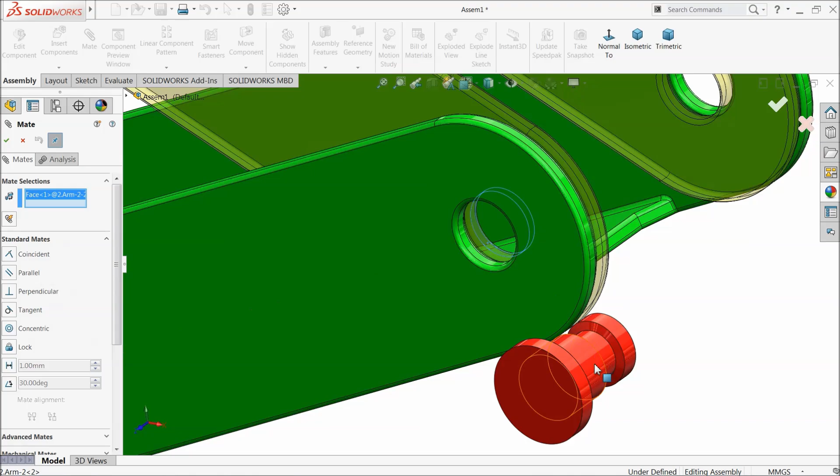Now press Ctrl key and drag this pin here. Again Ctrl key. Concentric relation. Coincident mate. Okay, we will try the same here with this circular face and this circular face. Make it flip mate. Select this face and the outer face. Coincident relation.

Browse our next part. Insert component, browse, part number 7, screw holder. Choose mate. Select this circular face and this circular face, make relation concentric. That's it. This face and this face, coincident relation.

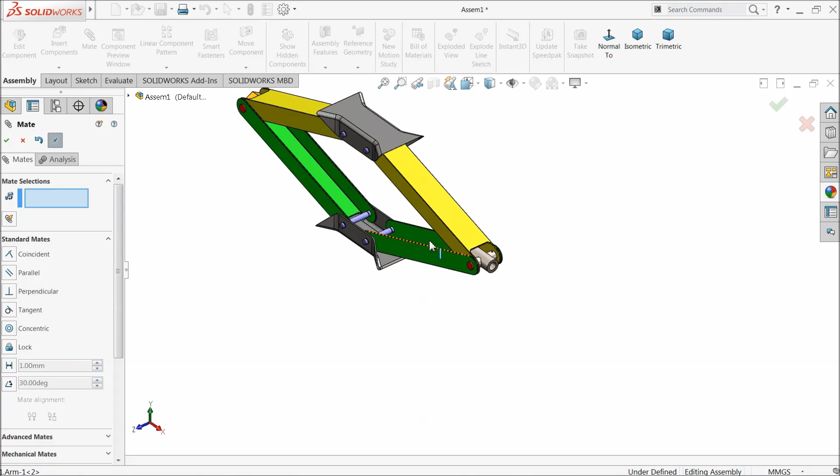Now select this face, select the top plane, and select this face and create one relation parallel. Now this is the parallel relation we created here.

Insert our next component, screw rod. Select mate, select this circular face and this circular face, make relation concentric. We want flip mate, so select this relation, flip mate. Select this face and this face, coincident relation.

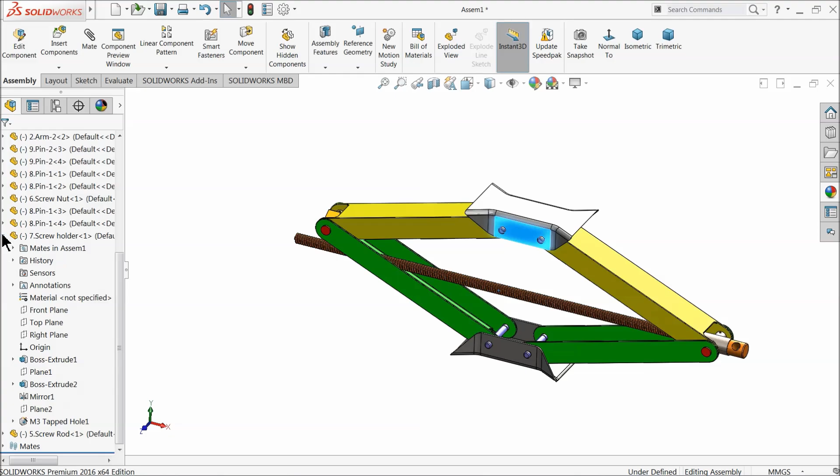Here we will delete one, suppress one relation, the last parallel relation with this coupler, let's delete it. And select this screw - here also we created one mate, parallel mate. Just delete this parallel mate. That's it.

Now choose mate, mechanical mate. Select here screw. Select this face and select this inside face and this face. Distance we will choose. Clearly check this face, inside face. That's it. Keep distance 3 mm per revolution.

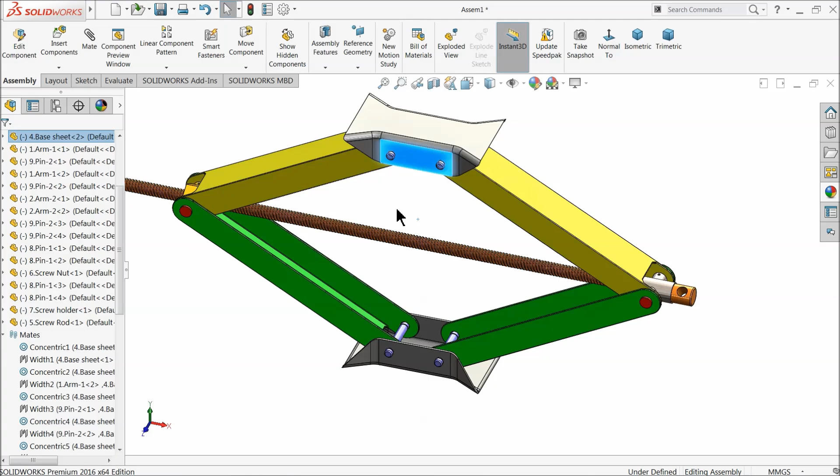Now see, you can see. Let's browse our next part, torque handle. Mate, select this face and this face, concentric relation.

Now here we need to create one more relation, otherwise it will rotate in a very abrupt way. Select the screw rod and let's check the plane, front plane. Okay let's choose this top plane, and press Ctrl key and this plane, and make relation coincident.

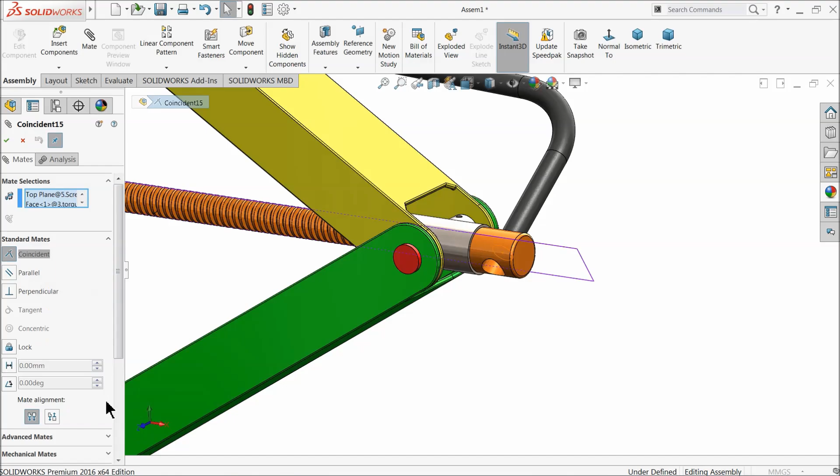Comes down, edit, and here we want to make some gap. 5 milli - it's 50 milli, that's also more. Keep 30 milli. Okay, that's fine.

Now still we need to create one more plane. Select here rod and right plane, and comes down, torque handle, control key, front plane, make coincide. We want reverse direction, so edit, flip mate. See, right plane of rod, screw rod, and front plane of torque handle, coincident relation. Okay, now let's try.

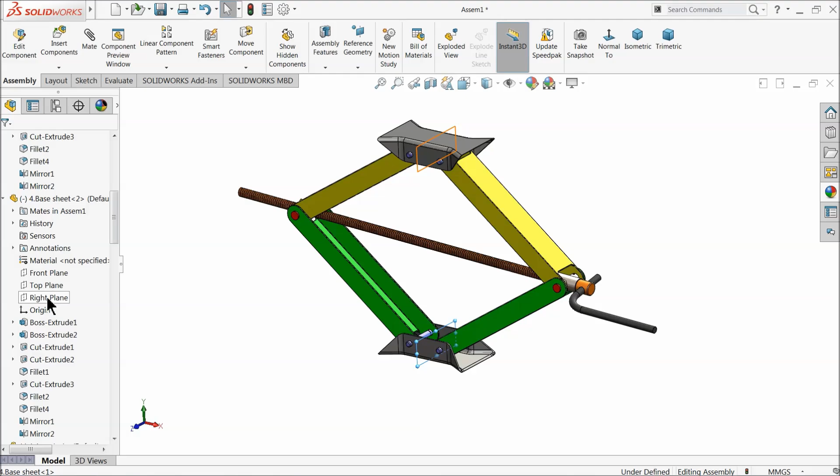See, that's perfect. Now here we need to create one more relation between these two bodies. Comes up, so select base, right plane of base 1, comes down base 2, and the same control key right plane of base 2. Select mate, select coincident relation. Now let's try. See, now our screw rod is ready.

So this is our car jack. I hope you like it.

Now it's time to make animation. Just drag it in particular position, and we will see up to how long it will go. Okay, now let's save this assembly, rebuild and save as an assembly, or any name you can give it, it's no problem.

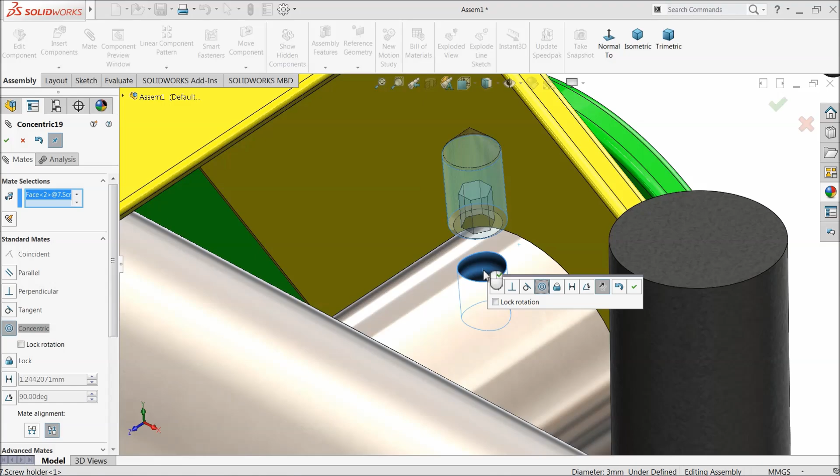Insert the last component, socket screw. Cancel it, and just drag it here, mate, reverse.

Select this face and point, coincident. Okay, here also choose the point, and inside face of pin, coincident relation.

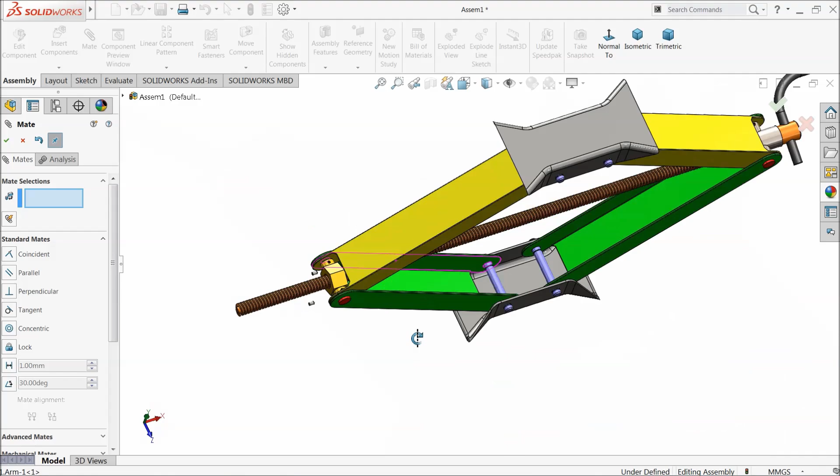Select this face and hole. We want to make it reverse, edit, flip mate. Select the inside pin, pin 1, and sharp corner of this, coincident relation. Here the last one.

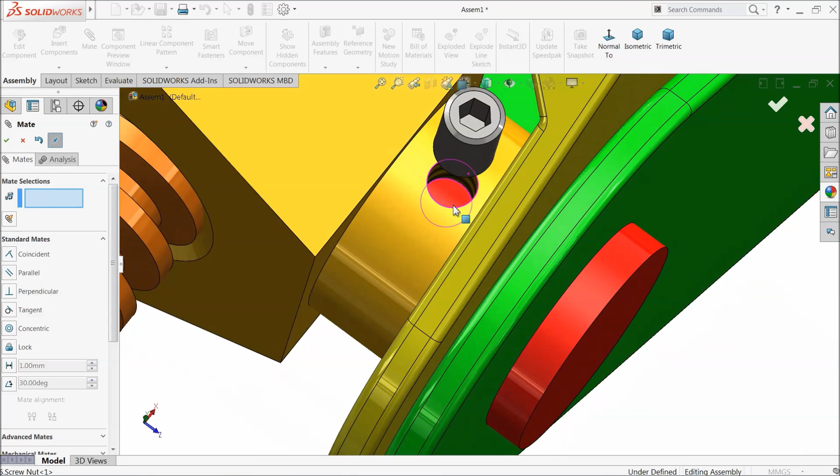Okay, but where did the pin go? Just hide it. Take the pin up. Again show the screw, comes down, concentric, edit, flip mate. Take it little up, inside face, and select the sharp corner, coincident relation. Okay, now our assembly is fixed.

Assembly is finished. Let's save again. So this is our car jack.

Exploded view. Let's make some exploded view. Select these two pins, take it out. This one, take it upward direction. This two pin also, take it out. This one also.

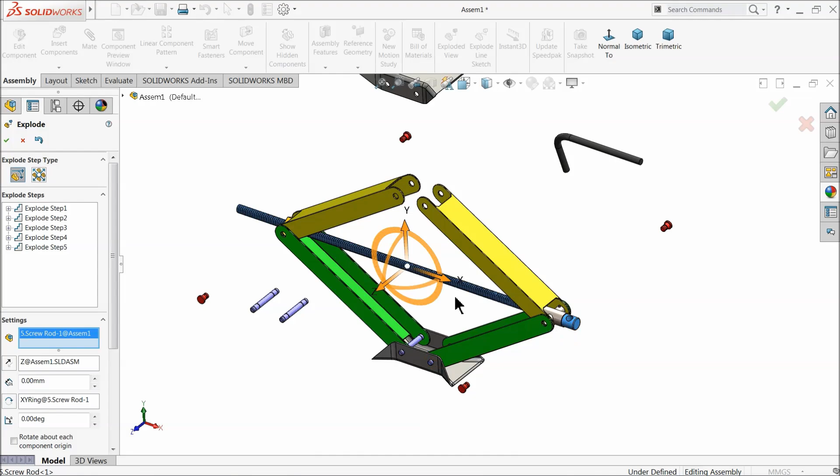Now comes this side, take it back. Take it out. Both take. And take it little up.

Select OK. Right click on the assembly. Collapse. Right click. Animate. See. Cancel it. Right click. Collapse. Right click here. Select motion manager. Create new study.

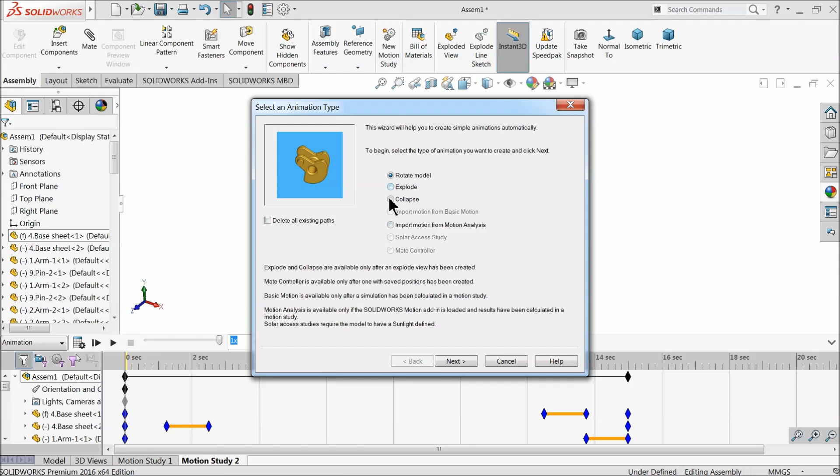Now here choose animation wizard, exploded view, finish in 15 seconds, duration 15 seconds, start time 0, finish. Again choose collapse, next 15 seconds and start time 15 second, finish. Now calculate. Now it's going to calculate the explode and collapse, both the views. You will see here all the views.

So now this is our simple car jack. I hope you like it.